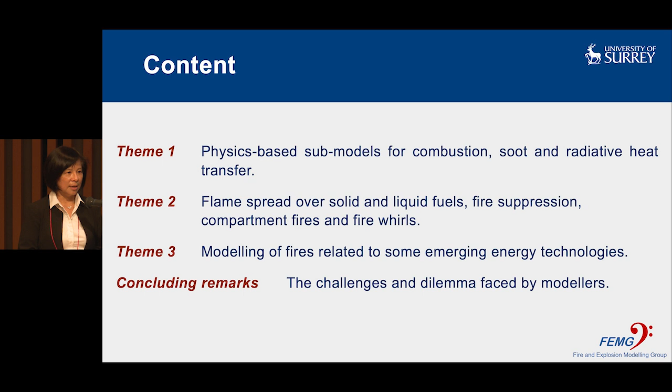And it's time we need to look at the emerging technologies. They bring challenges as well as opportunities. So I will start with my first topic, which is about physics-based submodels. You all know that for fires, we have turbulence, combustion, and soot and radiation. I won't talk about turbulence today, but I will start with combustion.

In front of you, the graph you can see is from a 2011 paper written by Yi Wang and his colleagues. The reason I brought this up is that mixed is burnt is a simple model which they developed in the beginning of FireFOAM, when it was modified and created out of the broader framework of OpenFOAM. So this is a simple combustion model.

I want to show that when they developed this in their papers, they did something fundamental first: they checked the energy conservation of the model and its implementation, represented here by the enthalpy flow rate, checking it through the computational domain. This is very important to me because it's fundamental—getting the energy balance correct, and such things, before we talk about reactions and the flow and the fire's interaction with the buildings, with walls, etc.

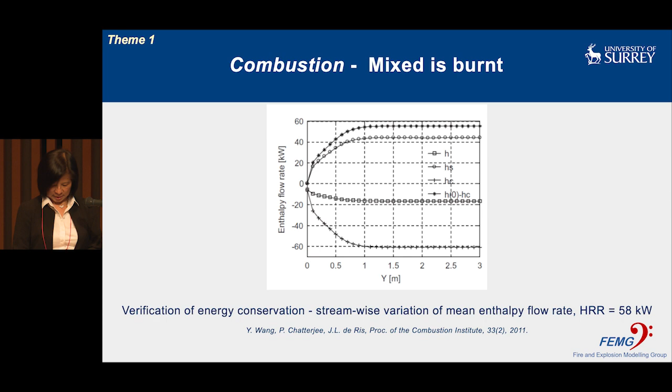As to my own group, during the period between 2010 and 2014, we engaged extensively in looking for another combustion model. My group previously used the flamelet-based combustion model, and we also used a hybrid approach to look at partial premix combustion and backdraft using FDS, where we used the flame index approach with flamelet, and for the combustion, a more simplified model switching to when it's a diffusion flame. But we later felt that for fire, we needed something even faster.

So we looked at the EDC, and what you see in front of you is the modified EDC form, which my group finally produced. That removed the tuning coefficients. As you can see, we have two constants there, 0.5 and 0.75 on the left.

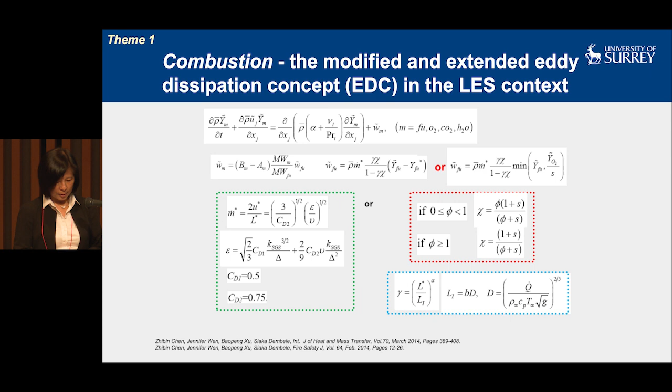We still follow Magnussen's cascading concept, but we did some modifications to impose the use of subgrid quantities, rather than the previous extension of EDC to LES, where people just directly used the turbulent quantities. This is the EDC which people just made a straightforward extension from the RANS-based EDC to the LES context.

The reason for that happening is those extensions calculated the combustion rate from the turbulence quantities, the global values, while at the flame base those are close to zero. So you wouldn't get a combustion rate there. With our modification, which I don't have time to go into details, the flame is now anchored at the bottom, to the flame base.

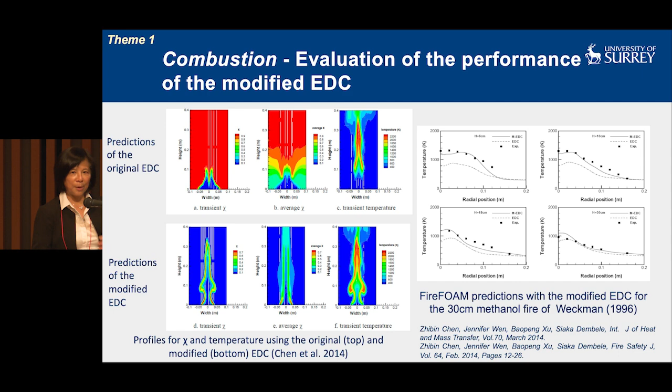I would also like to mention the MaCFP workshop before the conference, which many of you probably attended. It's an excellent initiative to bring modelers together and look at the fundamental side of the modeling approaches, using comprehensive experimental databases, so the modelers can better validate as well as improve their models.

On the left there is an example from the 2018 workshop, which was published as a proceeding. What we could see there is reasonably good agreement for the temperature, shown on the left at the top. But in terms of the root mean square temperature, we got more variations and discrepancies, and less so for the velocities, which is shown down there.

Sorry, I forgot I have this more powerful technology. So for this mean temperature, reasonably good agreement, but for fluctuations and the root mean square, I think we got more discrepancies. Similarly for the velocities down there.

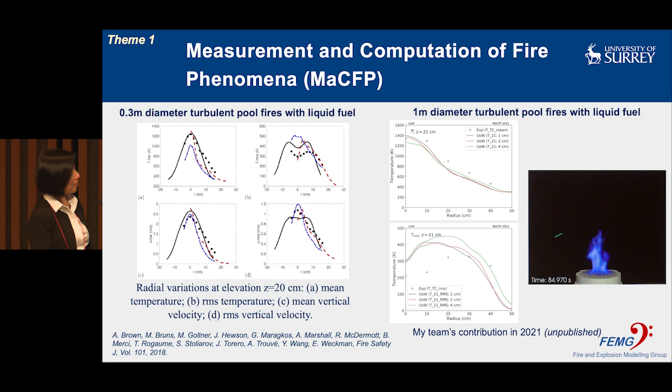This is about 21 centimeter height. So the temperature is reasonably good, but the root mean square quantities comparison with experiments show quite big discrepancies, and unfortunately we didn't have time to look at it.

One thing I found challenging with MaCFP is that when we have different projects and put time into it, once we solve a problem, it's really difficult to find the time to see how we can change the model and do it better, because it's not directly related to any projects we have at that time. Another work which we did is soot.

It's really important, and we listened to the talk of Professor Consalvi's student yesterday. In fire, the radiation heat transfer from gas contribution is only part of it, and soot plays a dominant role. Traditionally, the fire community either uses simple correlations or the Lindstedt two-equation model, which we used as well in the beginning. But I was motivated to try to develop our own soot model.

What we did was, along with the modification of the EDC, we also developed a soot model along the same style of thinking.

But that's in the first paper, the 2014 paper. What we found with that one is we made an assumption that the soot oxidation is constant. Later we re-looked at it and used the partial stirred reactor concept to modify that soot model, so soot oxidation is now computed rather than assumed to be a constant.

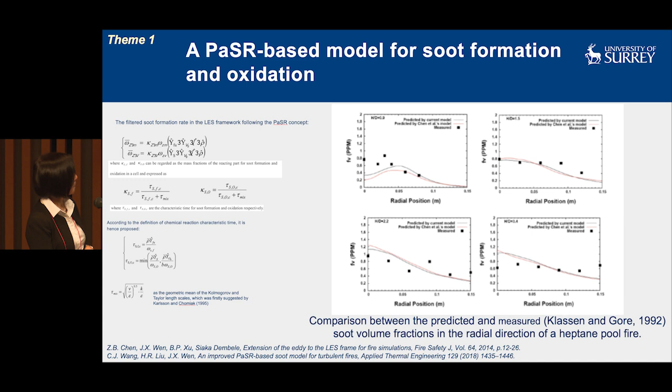Another thing we did - we also spent time looking at radiation. Many of you know the gray gas assumption, the constant, assuming a constant. Some of you may also use the weighted sum of gray gas models. It's important to note there are many different formulations of WSGG in the literature. They are banded models, and they are also gray models. By gray models, I mean the waveband is not considered.

While the band models consider the band, they're not like the detailed radiation model - they consider regions of band. So they can be 5 bands or 3 bands, because to do radiation considering the full spectrum is extremely expensive, which doesn't really pay off, as I said in the beginning, for fire simulations, because the soot contribution is more significant.

So we looked at different wideband WSGG models, and the interesting message I wanted to give on this plot is, for fire simulations, in most cases just using the Gray-Smith model - which is this one, the simplest one, the gray one, and it's computationally most efficient - yes, it's good. Using the more detailed, computationally more expensive banded models of Smith himself, or Cassol, or Johansson, doesn't necessarily improve your results that much.

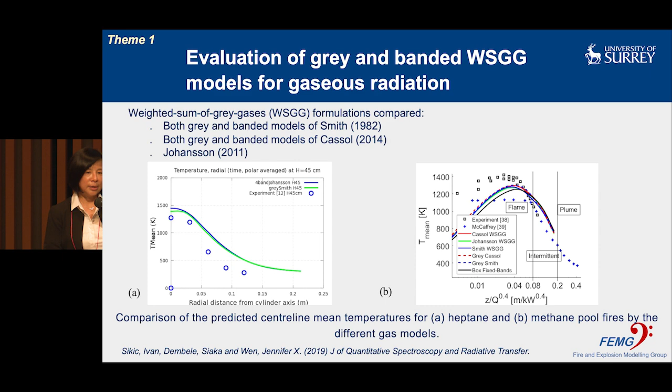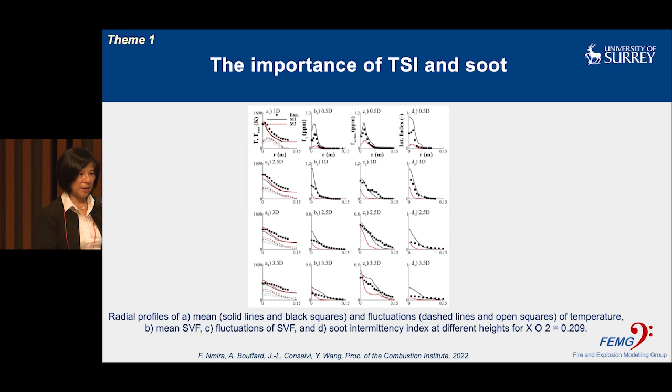But the important message we're trying to give is about the importance of turbulence. TSI stands for turbulence and soot interaction. So whether this is included affects the detailed calculation of soot volume fraction significantly. I just wanted to highlight this - TSI is important and it affects the soot calculation. In our simple soot model, we didn't consider this, and it's a point for those interested to think about.

Now I will move to the applications, and as Bart mentioned, we worked on a number of applications. I will start with flame spread - this is flame spread over PMMA, a combustible material quite often used in experiments because it's simple. So we compared the pyrolysis and the flame heights with the experiments.

As well as the flame spread rate and the total heat flux. I wouldn't say that we have any invention in this - basically this calculation was done just using the modified EDC and the soot model and the radiation which we investigated earlier, and there was some special treatment near the wall.

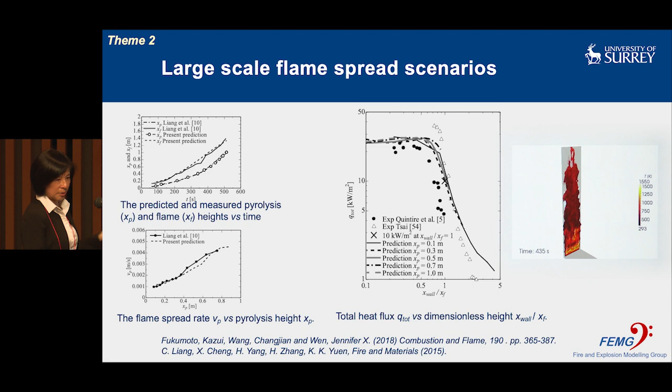And otherwise it's just an approach to model flame spread. Then more recently I got interested in flame spread over solid liquid fuels, especially alcohol, which has a low flash point, and we became particularly interested in the spread phenomena very close to the flash temperature of the fuel.

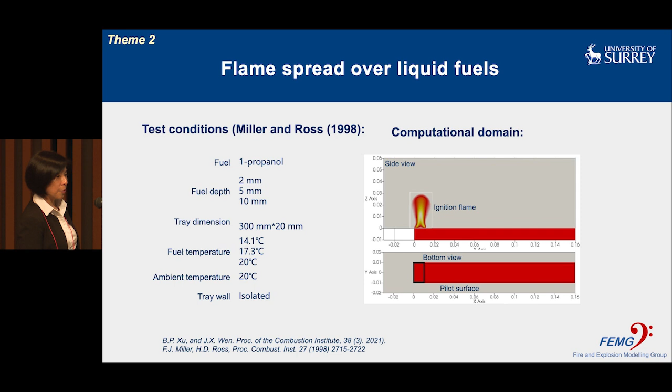So one paper already came out, and that one was very much inspired by Miller and Ross's paper in 1998. The reason we picked that paper is there are many papers about flame spread over liquid fuel alcohol pools, however the information - sometimes the conclusions and discussions - are contradictory and not clear among the papers. We found this Miller paper to be the most comprehensive, with some solid measurements in it.

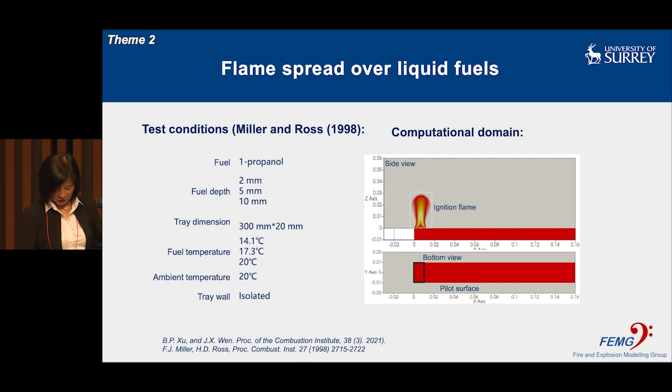So we looked at two cases. The first, above 290 K, is below the flash temperature, so we have a pulsating flame spread. Because the fuel temperature is below its flash point, the flame moves, then stops, then moves again. It needs to be warmed up to produce a flammable mixture in front of the flame for combustion to start again, so we get that pulsating mode.

But when the temperature is higher, we get a uniform spread, because there's always combustible material, a flammable mixture formed in front of the flame and ready to join the combustion. The boundary between pulsating and uniform modes is only about 1 degree centigrade.

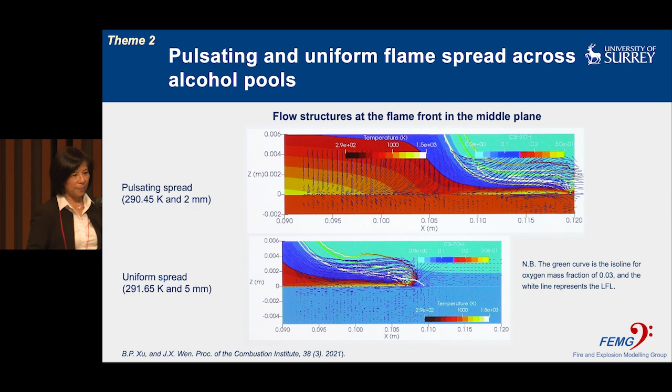This is direct numerical simulation using OpenFOAM. We solved the solid region, the liquid fuel region, and the flame, and coupled them dynamically. In the solid region we tried to speed things up by treating it as incompressible, and we used the reactingFoam for the flame dynamics.

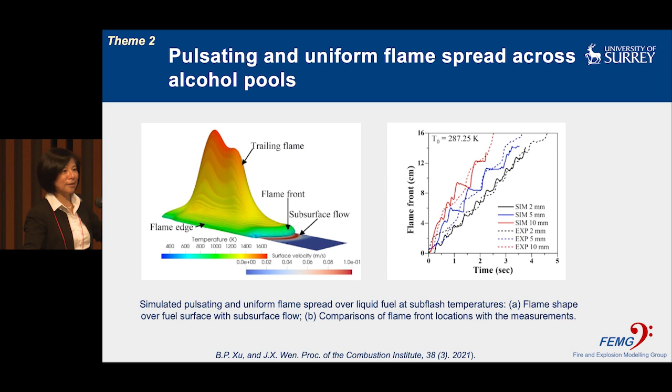Also, importantly, for those doing experiments, it would be very nice if somebody tried to look at the subsurface flow and get some PIV data for that. I've been trying to talk to several people to do this, but nobody seems to be taking my suggestion up, and it probably would be expensive to do. Somebody told me it's really difficult to get the flow and recirculation zones in the liquid region for model validation. We saw it in the model, but experimentally people haven't produced that kind of data.

Moving to mechanically ventilated fires, I think I will skip this quickly. It's just some simple calculations which my postdoc did some years ago.

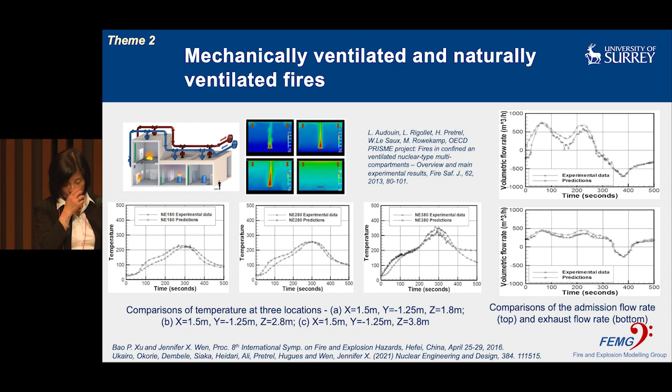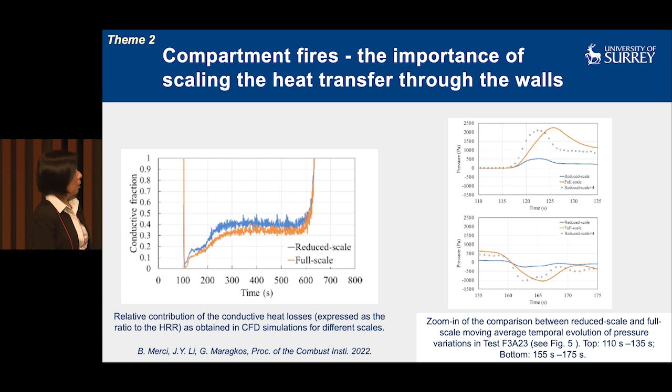Now I move to fire suppression, looking at some large-scale examples.

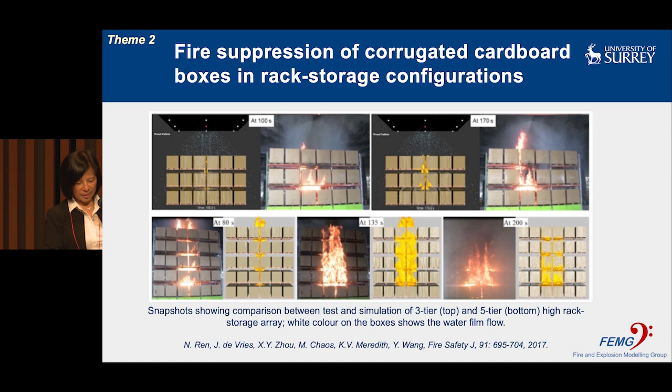This is the work Zheng and his colleagues did some years ago. At the top you have the 3-rack storage, comparing modeling prediction with experiments. Quantitatively, for both the 3-layer and the 5-layer cases, the simulation captured the experimentally observed scenarios.

So a lot of challenges. This is the earthquake in 1921 in Japan.

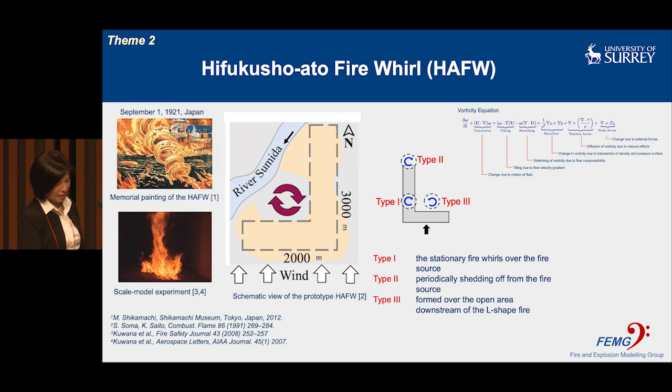After that, people discovered the serious situation was partly due to the wind-driven flame spread that happened after the earthquake, because of the setup and configuration of the regions, resulting in 3 types of fire whirls. Conscious of time, I don't think I have time to go into the details of that.

So what we did is we implemented the vorticity equation to figure out the mechanisms of different types of fire whirls, their link to baroclinic torque, and also the traction, looking at the mechanisms behind the three types of fire whirls.

Moving quickly to emerging technologies, my group has been working extensively in hydrogen and hydrogen safety. That's another area which has taken a lot of time.

What you see here is a conventional hydrocarbon fire engulfing a high-pressure hydrogen tank. In OpenFOAM, we developed the conjugate heat transfer approach, dynamically coupling the fire dynamics with its attack on the tank. We predict not only the tank temperature, but also the percentage of virgin material left in the tank after decomposition following fire attack.

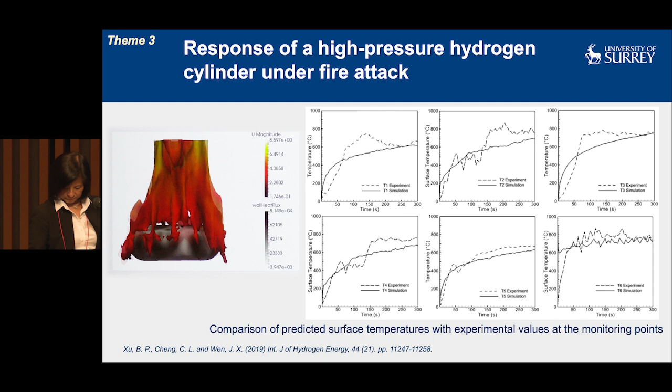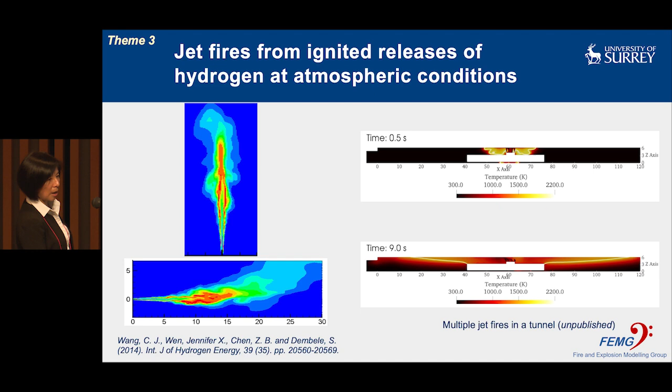We also worked extensively on predicting jet fires - hydrogen jet fires, vertical, horizontal, or multiple jet fires in tunnels. More recently we've been looking at cryogenic conditions and jet fires, typically anything from 20 to 120 K. With cold hydrogen jet fires, hydrogen becomes liquid at 20 K.

We looked at how, depending on the ignition point - if it's close to the release point, like half a meter or one meter - you get a diffusion flame surrounding the edge of the hydrogen jet, while the center is really cold, and the flame doesn't propagate into that cold center.

But if the ignition point is 1.5 or 2 meters away from the release point, a flammable mixture has already formed, so you get a more partial premixed flame, dominated more by premix combustion, but there are also diffusion flames on the edge.

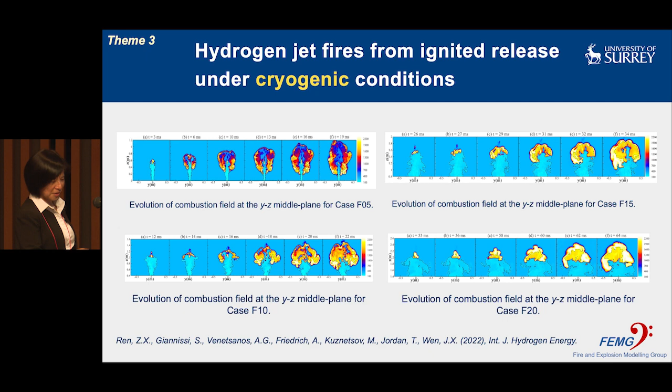So it's very interesting. Another front my team is currently working on is battery failure and battery fires. My thinking is that to understand battery fires, you always need to go back to the basics of why the fire started, so we approach it the same way.

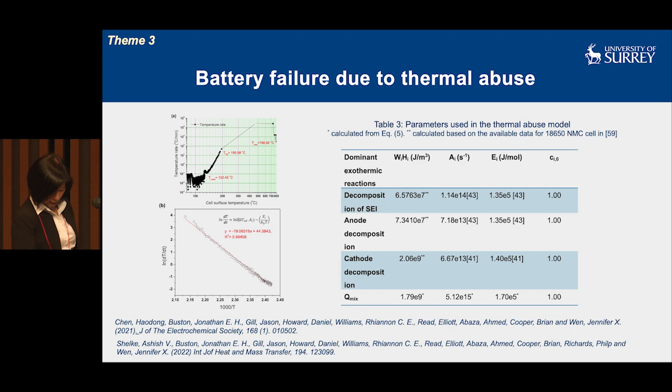I don't believe in trying to do detailed simulations of everything happening inside the battery, because the materials change rapidly. So our approach is: when a new battery comes in, we test it in an accelerating rate calorimeter. We get these curves, and from those temperature curves we fit one-step Arrhenius equations for different stages of the decomposition runaway process. Sometimes we compare two stages, three stages, five stages, and then put this into our CFD code so we can look at the thermal runaway situation of a single cell.

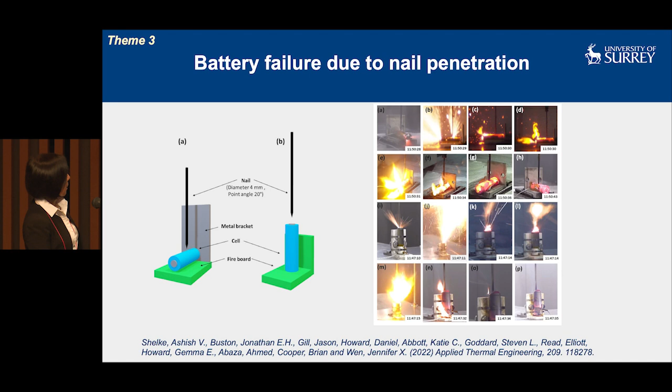We also developed models to predict the evolution of surface temperature - we also have internal temperature, and you can see it in 3D, but I plotted the surface temperature here compared with experiments. For axial penetration, our predictions agree well with one set of data, but not with others.

A big reason is that the people who did the experiments told us it's difficult to get the nail exactly through the center, so every time they tested, the nail penetrated at a different location. With radial penetration it's easier for them to go through the middle, so we see better agreement with the data.

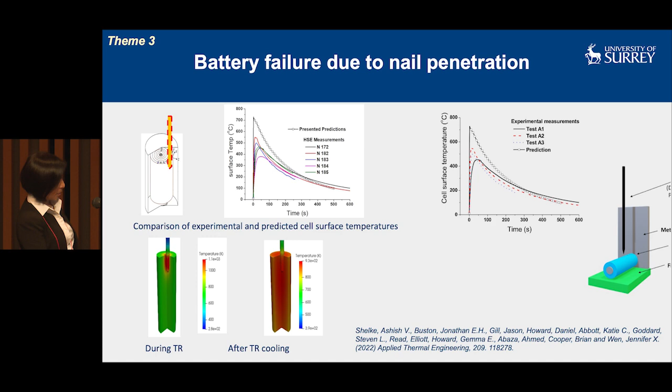Another important thing about batteries: when they go into thermal runaway, they don't just emit gases - including hydrocarbons and some percentage of hydrogen - but more importantly, there are also particles coming out. These are hot particles, some of them carbon, some of them molten metals.

There's a big possibility that these hot solid particles are actually the ignition sources for those combustible gases that come out. So in one of our projects with industry, we looked at the possibility of mitigating the propagation of thermal runaway and battery failure by putting in some kind of special material - I can't say what material.

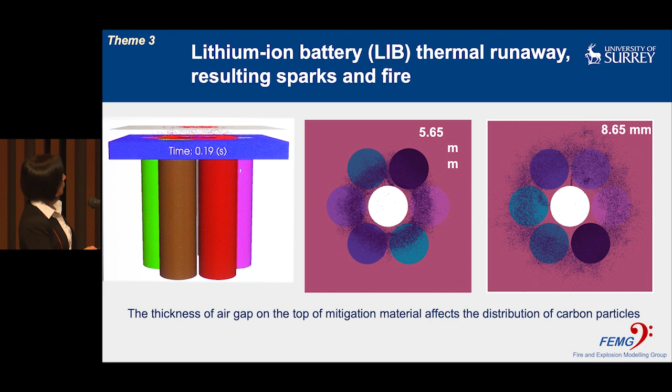We put some kind of special material on top of the cells, which would have the effect that these particles are reflected back when they come up, since on top there's the cathode. These batteries are in modules, and the particles, if they fall right on the cell top, would easily trigger thermal runaway propagation. But if there's a material stopping them in between, we found that the chance of thermal runaway failure propagation would be significantly reduced.

The gap between the casing and the cell top is also very important, and increasing this gap can help prevent thermal runaway, or at least slow it down. But for manufacturers and industry, even increasing it by 1 millimeter is sometimes a big problem for them—there are spatial issues, cost, weight, all sorts of things.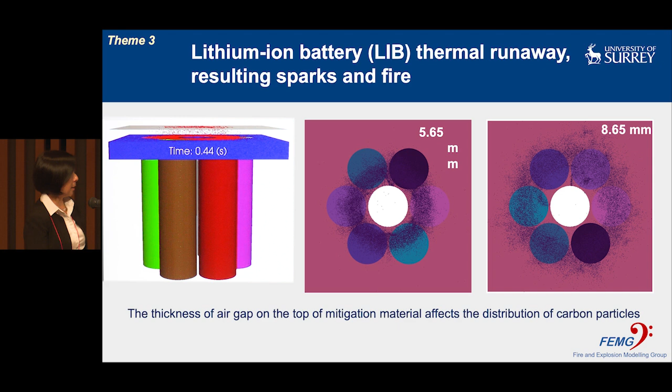We also simulated the battery vent fires. I don't think these look exactly like real battery fires, even though I've shown you some photos we took. What we're trying to do is capture the global characteristics of battery fires using simplified models which we derived—these are jet fires.

They are driven by the release pressure. So we did a measurement of the internal temperature, and we tried to measure the internal pressure as well, but unsuccessfully, because it's difficult to reseal after putting the pressure sensor in. So we used a combination of internal temperature and collected gas overpressure to derive a model that would give us approximately the pressure evolution inside the cell after thermal runaway, and used that as boundary conditions to model these fires.

Then we compared it with the cone calorimeter measurement of the heat release rate, and we got really good agreement.

So to conclude, I think across the community, fire modeling has come a long way, and there are successes, but there are also great challenges. A lack of detailed measurements for model validation is one of the problems we have. And upscaling—ideally, many of us writing proposals say we're going to do CFD modeling and then upscale from small scale validation to do large scale calculations. Sometimes it's not always the case, because even at small scale we make simplifications, and those simplifications don't necessarily hold when we go to large scale.

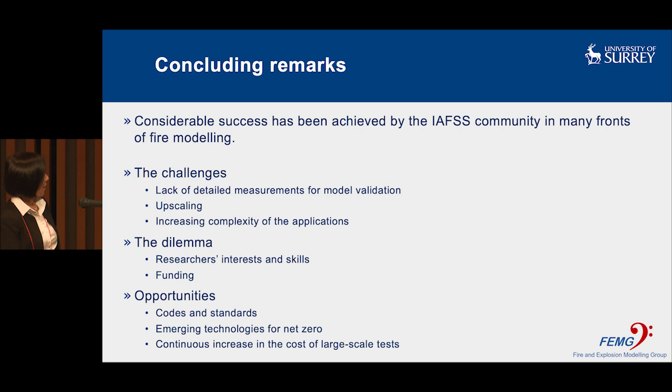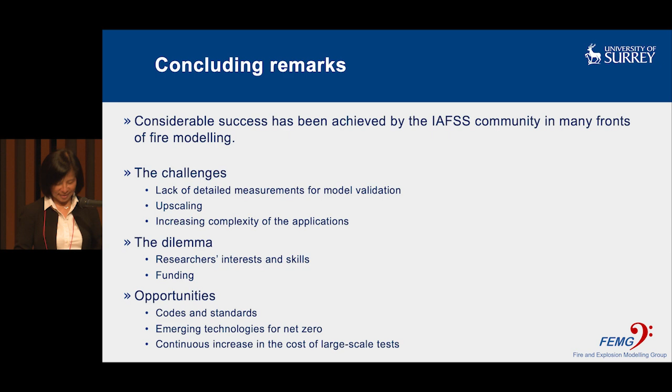But there are opportunities coming up, with many gaps emerging from new technologies as well as codes and standards. It should be possible for more groups of fire researchers to come together under some kind of international funding, so we can do a bit of this together. There's also a continuous increase in the cost of larger scale testing, so modelers can explore that situation to benefit our research and get funding for it.